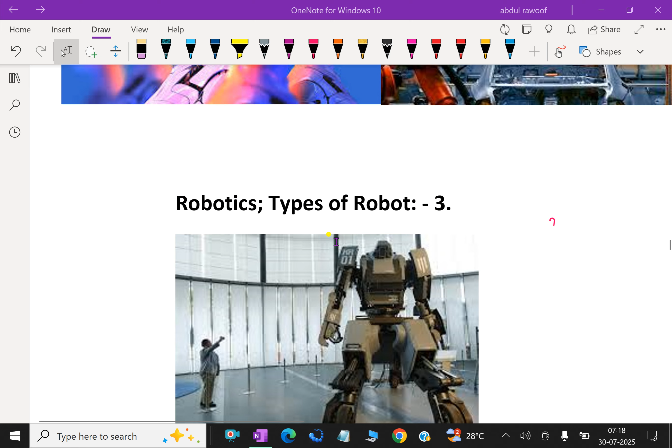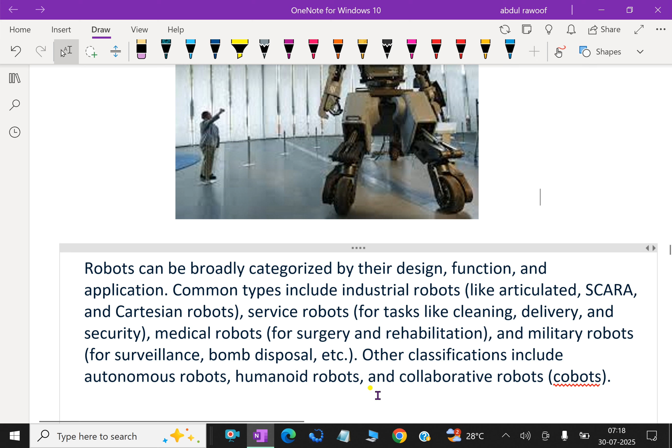Robots can be broadly categorized by their design, function, and applications. Common types include industrial robots like articulated, SCARA, and Cartesian robots, service robots for tasks like cleaning, delivery, and security, medical robots for surgery and rehabilitation, and military robots for surveillance, bomb disposal, etc. Other classifications include autonomous robots, humanoid robots, and collaborative robots, that is, cobots.

Now, for the discussion, here is a detailed breakdown by design and structure.

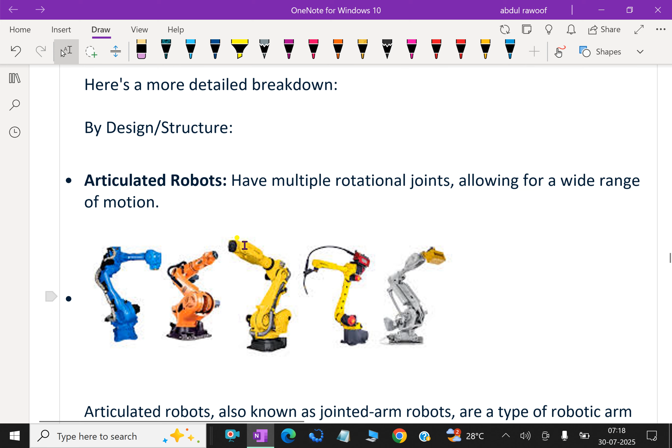Articulated robots, what are they? They have multiple rotational joints allowing for a wide range of motion. Articulated robots, also known as jointed arm robots, are a type of robotic arm characterized by multiple rotating joints, that is axes, that allow for a wide range of motion, mimicking the movement of human arms. They are commonly used in industrial settings for tasks like welding, material handling, and assembly due to their flexibility and dexterity.

Cartesian gantry, or gantry robots, utilize linear movements along three axes, X, Y, Z. A Cartesian gantry robot is a type of Cartesian robot characterized by its large-scale overhead structure consisting of a framework with a movable bridge that carries robotic arms or tools. It provides precise movement along three orthogonal axes, X, Y, Z, for various industrial automation tasks.

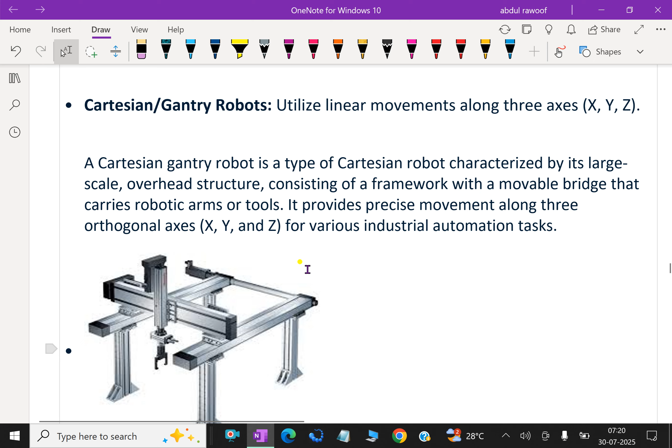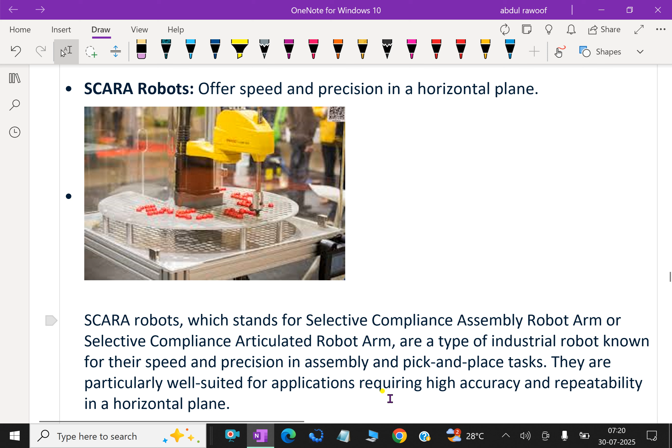SCARA robots, what are they? They offer speed and precision in a horizontal plane. SCARA stands for Selective Compliance Assembly Robot Arm, or Selective Compliance Articulated Robot Arm, a type of industrial robot known for their speed and precision in assembly and pick and place tasks. They are particularly well suited for applications requiring high accuracy and repeatability in a horizontal plane.

Delta parallel robots feature multiple arms connected to a base, enabling fast movements. Delta robots are a type of parallel robot known for their high speed and precision, especially in pick and place applications. They use a parallel kinematic structure with three arms connected to a moving platform, allowing for fast and accurate movements within a limited workspace.

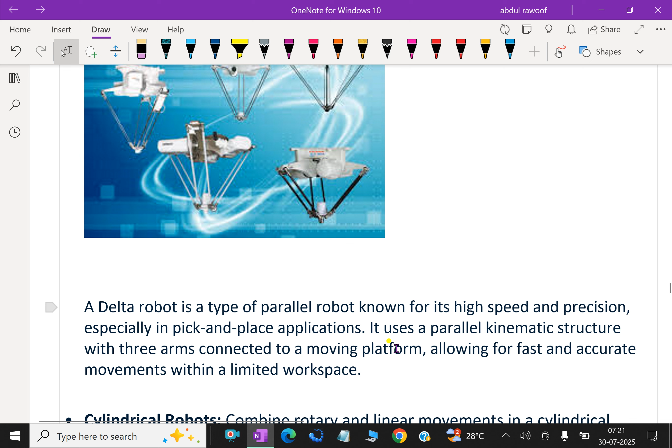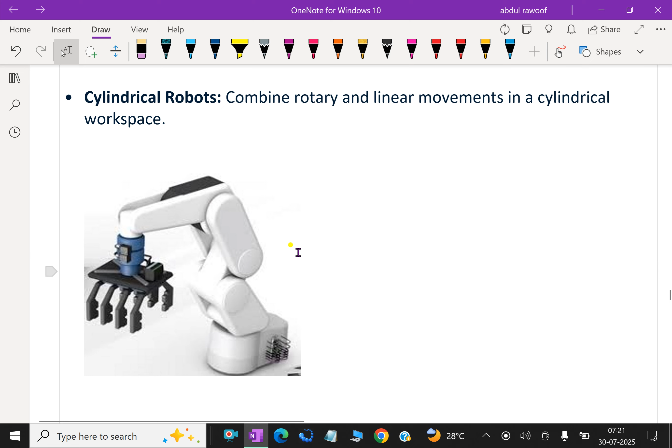Cylindrical robots combine rotary and linear movements in a cylindrical workspace. Cylindrical robots are a type of industrial robot characterized by their cylindrical coordinate system, which provides a work envelope shaped like a cylinder. They feature one rotary joint at the base and two linear joints, one vertical and one radial, allowing for both rotational and linear movements. This configuration makes them well suited for tasks requiring movement within cylindrical workspaces such as machine tending, material handling, and assembly operations.

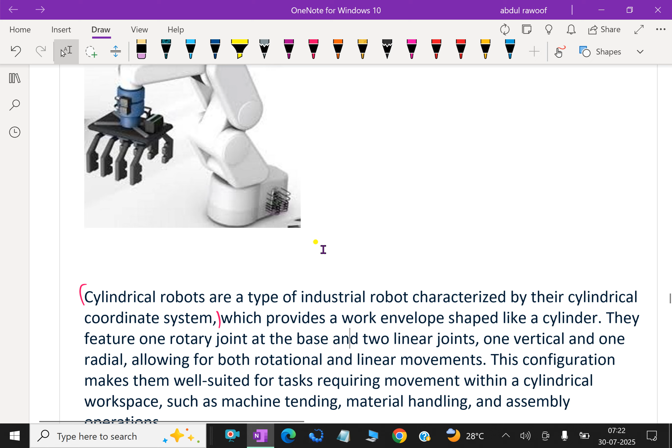Polar robots use a combination of rotary and linear movements in a spherical workspace.

Polar robots, also known as spherical robots, are a type of industrial robot with a distinctive configuration. They feature a base connected to an arm with two rotary joints and one linear joint, resulting in a spherical work envelope.

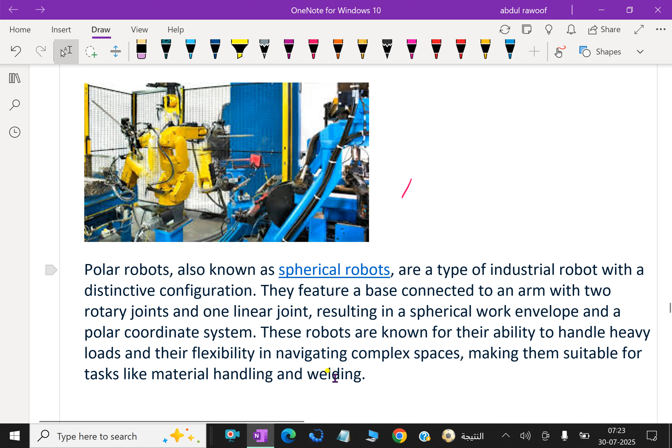This results in a polar coordinate system. These robots are known for their ability to handle heavy loads and their flexibility in navigating complex spaces, making them suitable for tasks like material handling and welding.

Next, by applications or functions. The categories are industrial robots that perform repetitive tasks in manufacturing and production of parts, shown here.

Industrial robots are automated, reprogrammable machines designed to perform various manufacturing tasks in industrial settings.

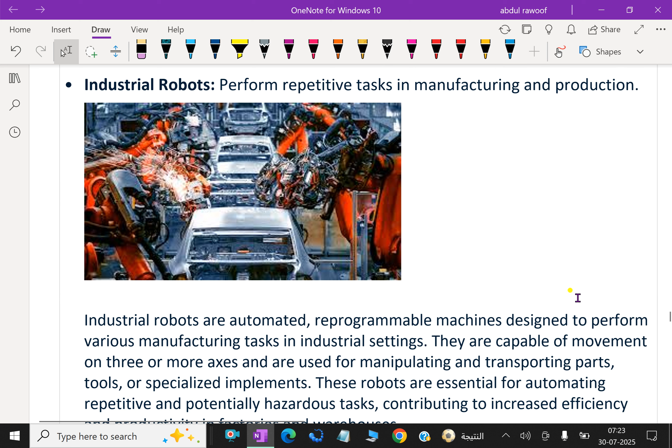They are capable of movement on three or more axes and are used for manipulating and transporting parts, tools, or specialized implements.

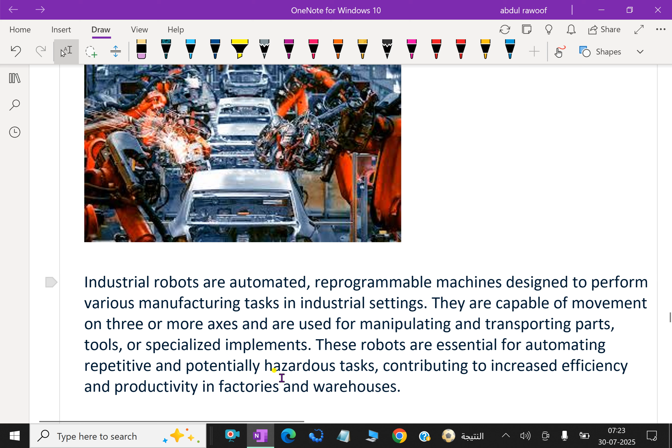These robots are essential for automating repetitive and potentially hazardous tasks, contributing to increased efficiency and productivity in factories and warehouses.

Next, service robots assist humans in various non-industrial settings: cleaning, security, and service. Service robots are designed to perform tasks that assist humans, often in situations that are dirty, dull, dangerous, or repetitive.

They are typically autonomous or remotely controlled and can be used in both personal and professional settings. Examples include cleaning robots, delivery robots, and robots used in healthcare, hospitality, or restaurants.

Medical robots are used in surgery, diagnostics, and patient care. Medical robots are sophisticated machines used in healthcare to perform various tasks ranging from complex surgical procedures to assisting with patient care and laboratory work.

These robots enhance precision, efficiency, and accessibility in medical treatments and procedures.

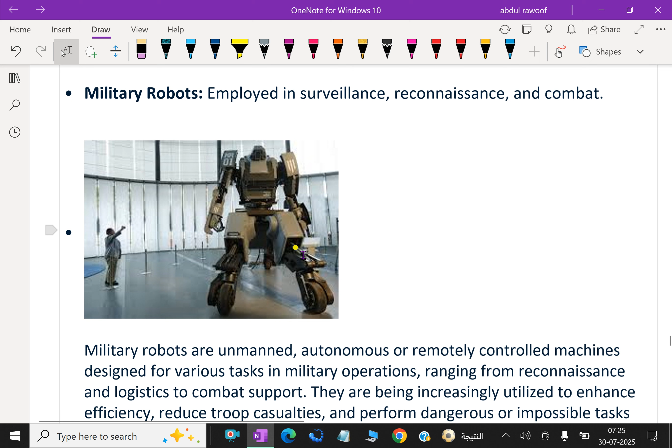Military robots are employed in surveillance, reconnaissance, and combat. Military robots are unmanned, autonomous, or remotely controlled machines designed for various tasks in military operations.

These range from reconnaissance and logistics to combat support. They are being increasingly utilized to enhance efficiency, reduce troop casualties, and perform dangerous or impossible tasks for humans.

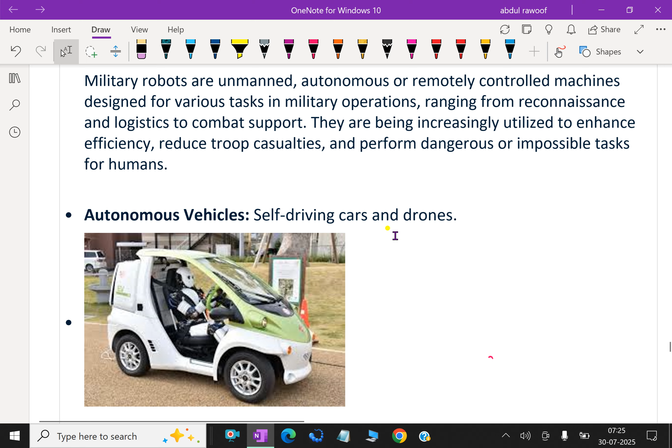Autonomous vehicles: self-driving cars and drones. Autonomous vehicles, also known as self-driving cars or robotic cars, utilize robotics and advanced technologies to navigate and operate without direct human control.

These vehicles employ a combination of sensors, cameras, artificial intelligence, and sophisticated algorithms to perceive their environment, make decisions, and control the vehicle's systems.

Collaborative robots, that is, cobots, are designed to work alongside humans safely.

Next, humanoid robots are designed to resemble humans in appearance and movements. Humanoid robots are robots designed to mimic the human form, typically with a torso, head, arms, and legs.

They are built for various purposes, including interacting with human tools and environments, studying bipedal locomotion, and augmenting human capabilities.

Humanoid robots can be used in a wide range of applications, from manufacturing and healthcare to education and even companionship.